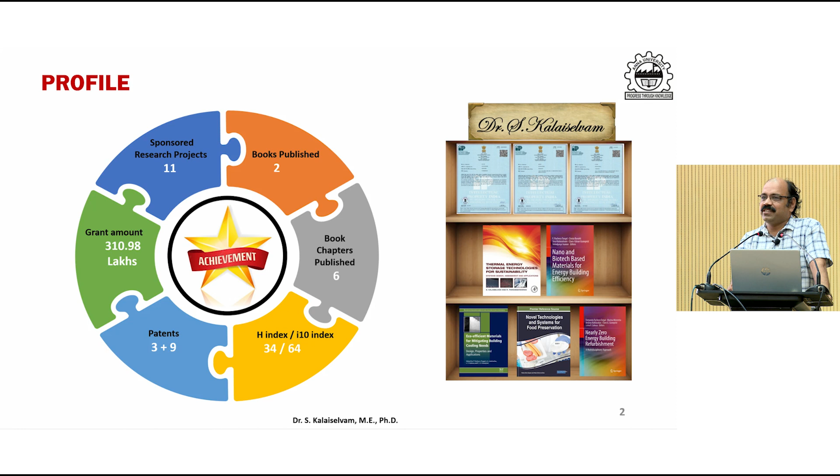These are all our research group. So far I have completed 12 PhD students, and 2 PDF students also, and these are the citations and publications.

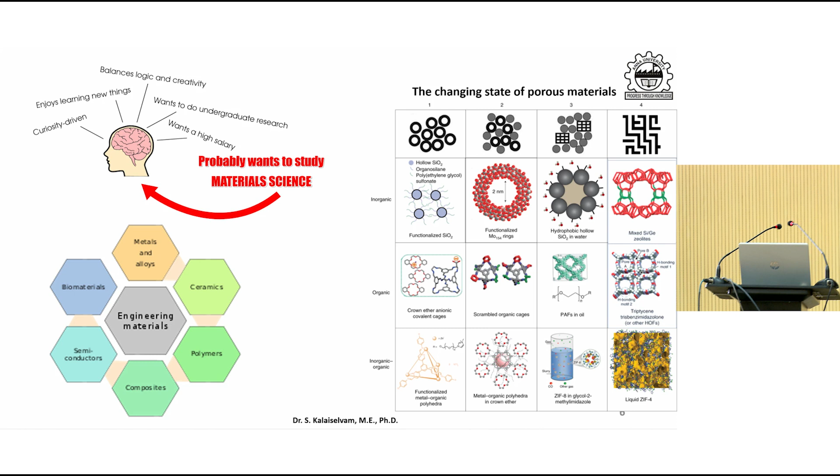material. If you look at that, why we have to choose this material research? So normally, if you look at this material research, what's here? If anybody wants to work with the materials, normally you may find new innovations, new things. If you work with conventional engineering or technology-oriented work, you don't find any innovations. And again, you have an opportunity to learn so many new things working with the materials.

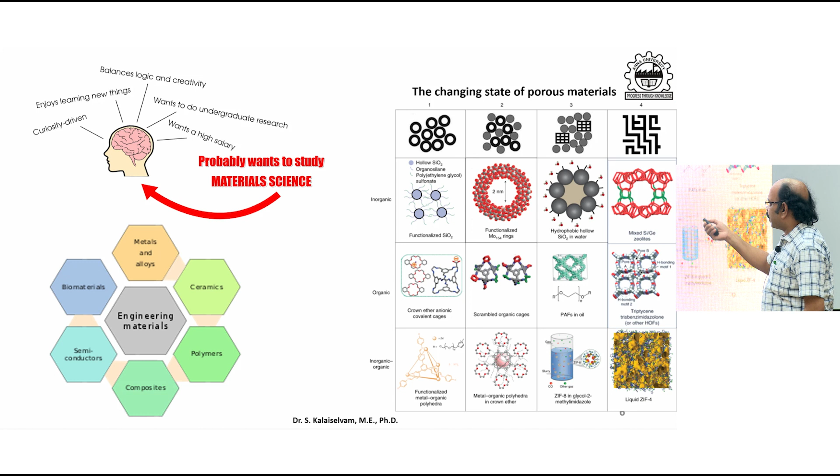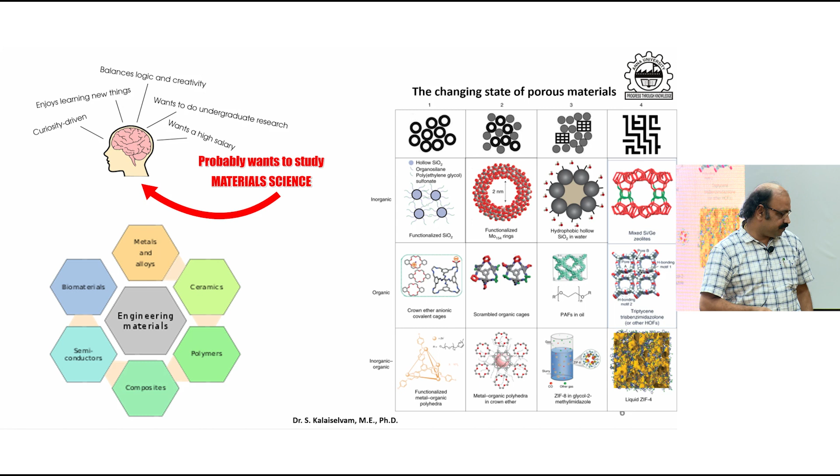Okay? And the salary, right? Normally, the salary is also very high if you work with materials. Okay, these are all the material engineering. You can work with metals, alloys, ceramics, polymers, composites, semiconductors, or biomaterials. And these are some of the porous materials. If you look at the material perspectives, it may be metals, or wood, or plastics, or textiles. Even it can be applicable for the electronics industries. So this material covers all this, right?

And again, because I know that it's a very heterogeneous group, I don't want to go deep into any of the materials. With the mechanical background, if I go deep into the mechanical perspective, sometimes it may get blurred. I will give only the overview of what we did in case of these materials. Okay? So these are all the various materials that you can work on and find new innovations. Okay.

So again, my work is with reference to nanotechnology. As a mechanical engineer, initially, as I told, I tried to work on refrigeration, that is air conditioning. My research was to make people comfortable with reference to ASHRAE standards, to meet all the indoor air quality standards. Initially, I worked for a period of 2 years. After 2 years, it was really very tough for me to publish papers. And that particular work also required funding. Okay?

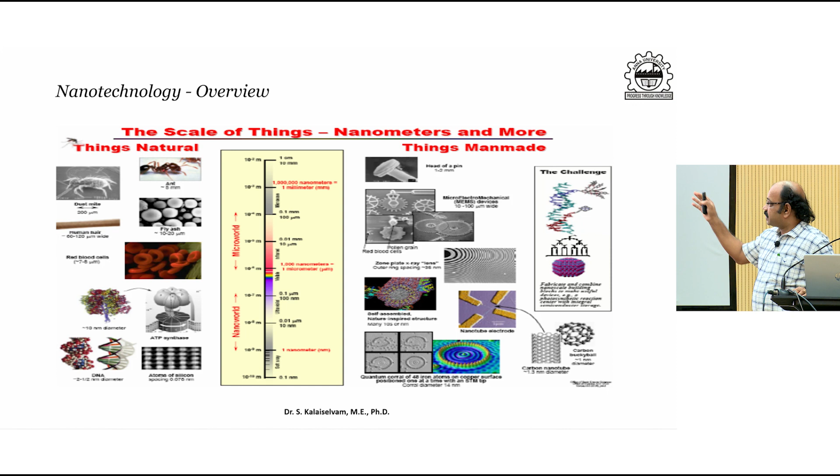So I chose phase change materials, and whatever stuff I showed in the first slide, it's all with phase change materials and nanomaterials. So this is an overview of how nano things work. And again, my work is on nano and energy storage. Because as a mechanical engineer, I can't work immediately with other materials, I work with these materials on energy storage.

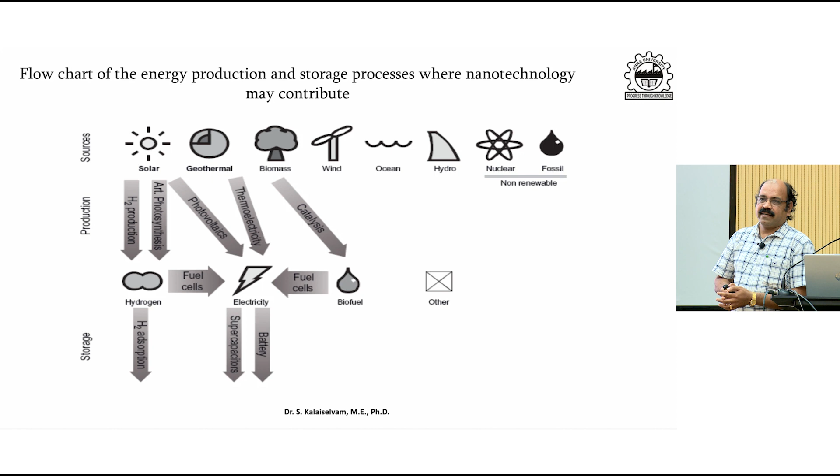So you all know why nano plays a vital role in any industry. If you use nano, you can have an increase in surface area. If there is an increase in surface area, you have higher heat transfer or higher energy storage. Even these days, people are working on hydrogen storage, and for hydrogen storage these nanomaterials are very helpful. And again, because of interface and size effects, nano plays a vital role.

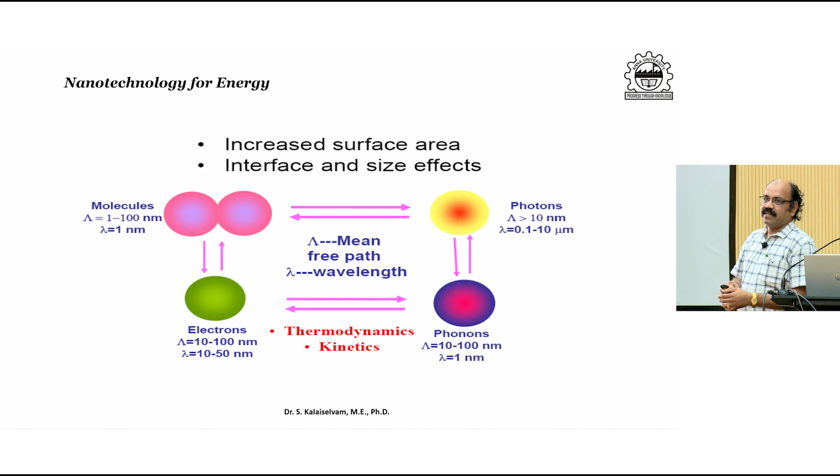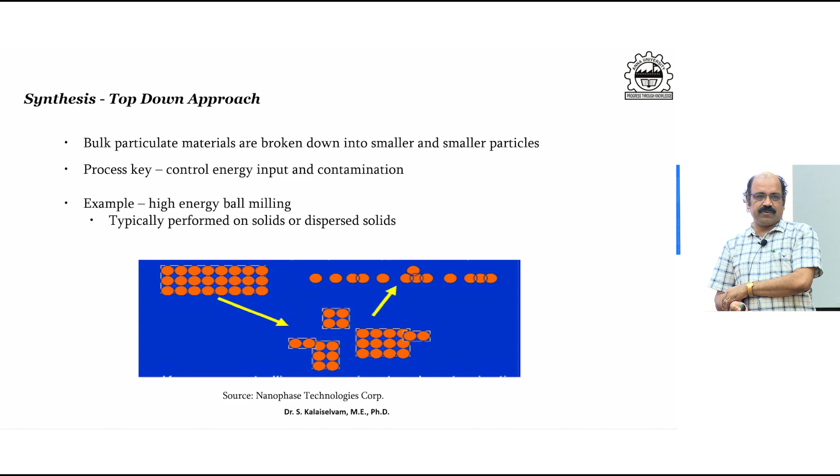As far as nano is concerned, we have nano synthesis by two methods: one is the top-down approach, and the other is the bottom-up approach. In the top-down approach, take paddy or rice; it's in the macro size. If you grind it, what happens? It becomes a powder, in the micro size. Macro becomes micro. If you further grind it with ball milling or other mechanical means, the size again reduces. This is the top-down approach: the larger size is brought down to the lower scale.

The other one is the bottom-up approach. Let us assume you want to make a cylinder, right? If you want to make a cylinder, what can you do? You can place 1 rupee coins, right?

If you place 100 one-rupee coins or 50 one-rupee coins in an inline direction, what happens? It becomes a cylinder. Similarly, in case of this bottom-up approach, we used to build the size whatever you want at the atom level. The atoms can be placed in such a manner that it can be formulated into whatever size or shape you want. And again, this particular one has a higher purity level.

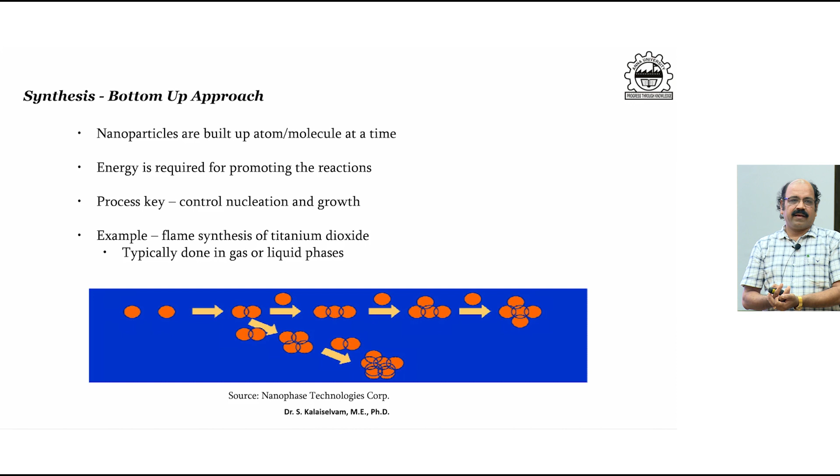Normally, initially, people who wanted to work with nanomaterials used to work with a top-down approach. It's one of the easiest methods. But even though it's the easiest method, there are a lot of impurities. I told you that we use grinding, milling and other operations, so the impurities in this approach will be very high. In case of the bottom-up approach, you work at the atom level, and it's a high purity level.

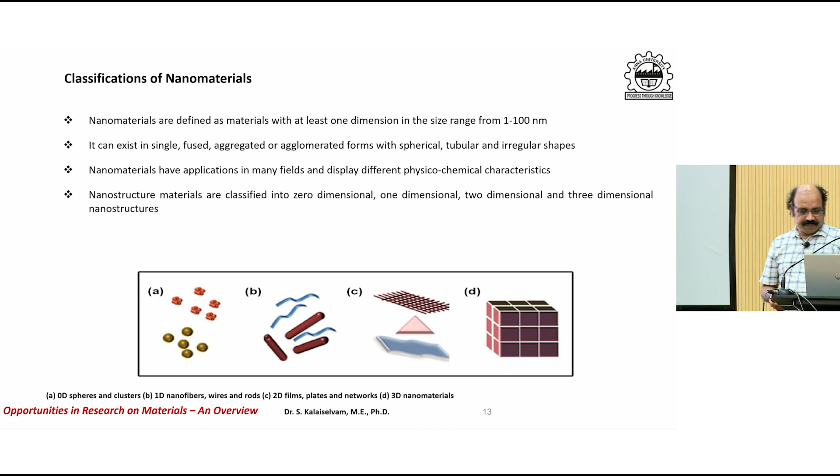So these are some of the nanomaterials: one-dimensional, two-dimensional nanofibers, wires, rods, films, or even 3D nanomaterials. Here again, some of the nanomaterials. This is by top-down approach; the center one is a nanomaterial. We can take this bulk material, make it powder, and it can be converted into a nanoparticle, or otherwise atoms can be formed into a cluster, and that cluster can be made into nanoparticles.

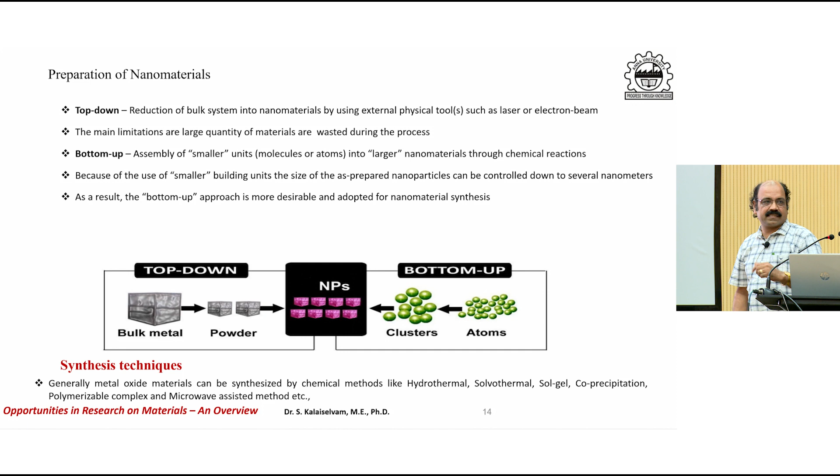Whenever I go for this nano type of discussion, you would ask why this is more important, right? Look at the properties of carbon nanotubes. If I ask a mechanical engineer which is the best conducting material, copper. We all know copper is the best conducting material. But carbon nanotubes are better than copper. What's the property of bulk carbon? It's an insulator. If you bring it down to the nanoscale, that insulating material becomes a good conductor, much higher than copper.

And if I ask about transistor material, we say the better transistor material is silicon, right? Carbon nanotubes will be better than this transistor material. Then heat conducting property: because of its higher heat conducting property and strength, we used to say diamond is the best, but this has twice the conducting property, field emission is more efficient than molybdenum, and the thermal stability of this material is important.

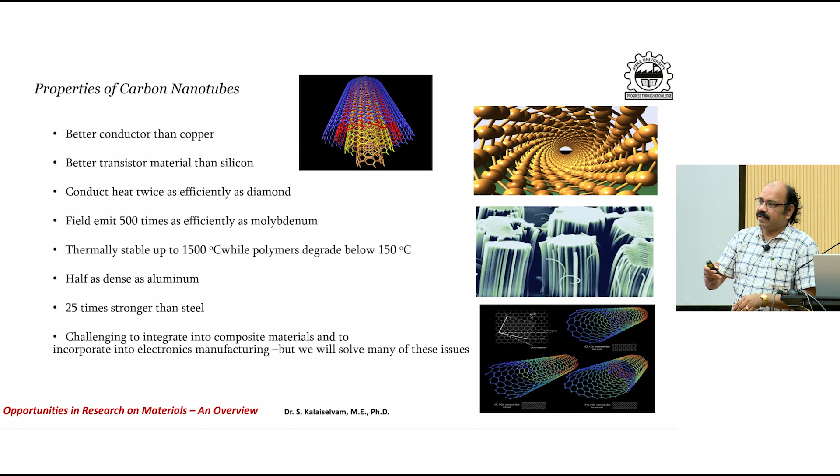Here again, these are nanofibers. Sometimes the synthesis of carbon nanotubes may be very complicated, but initially, instead of synthesizing carbon nanotubes, you can easily produce these nanofibers even at lab scale without any specialized equipment. These fibers have a diameter less than 100 nanometers, and they can be easily produced by polymerization and electrospinning. I am going to tell you how they are synthesized.

Their properties: high surface area like carbon nanotubes, high porosity, and the diameter ranges from 50 to 100 nanometers. It's ultra thin, very soft, and can be easily mixed with solvents. It has a soft touch, and this particular one was produced in our laboratory.

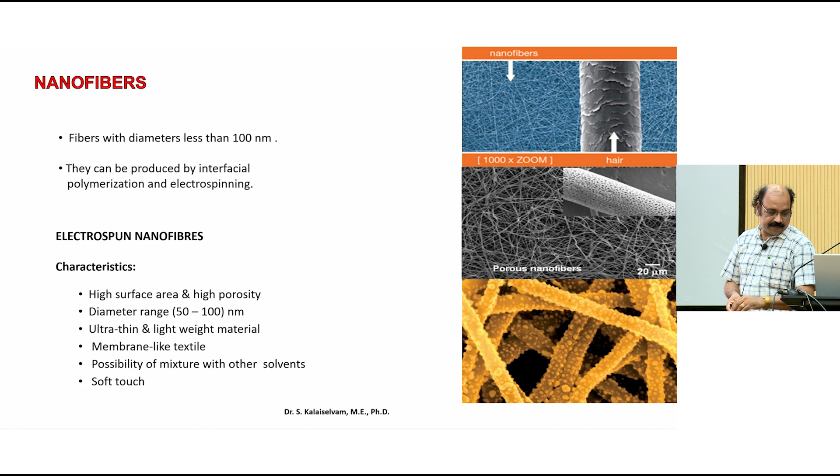This polymer nanofiber application is used in tissue engineering, wound dressing, medical applications, sensor devices, electrical and optical applications, and materials. This nanofiber finds wide applications. Whether you are an electrical engineer, electronics, civil or mechanical engineer, or any other field, you can use this material.

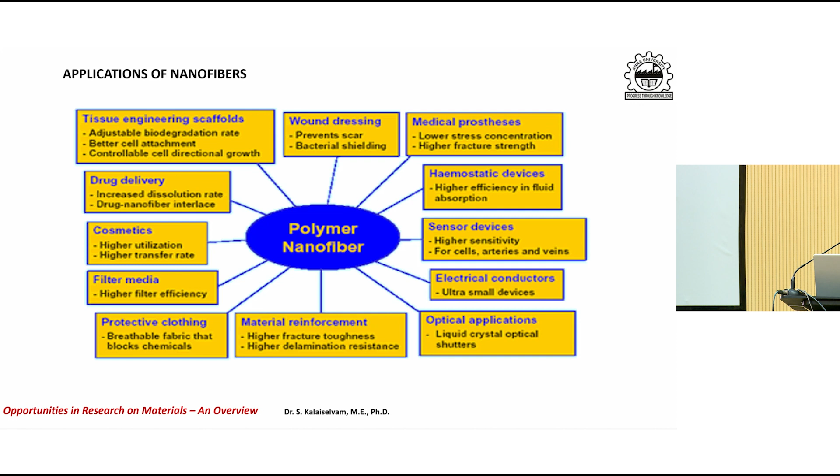That is why I'm giving an overview. If you take electronics applications, you may look for an alternative for silicon, and we have an alternative with superior properties. In case of mechanical engineering, sometimes we look for higher thermal conductivity or higher heat transfer coefficient, and using this nanomaterial or nanofluids, you can find high efficiency.

In olden days, in automobiles, if it's stuck in between, what they used to do is open the bonnet and fill water in the radiator. Do you ever notice that? But these days, does anybody fill water into that radiator? You don't find that. If you look at the previous, olden days car radiator, the size is very large. If it's larger size, obviously the cost will be higher, and the material required is also much higher.

So these days people use nanofluids as the fluid inside the heat exchanger or radiator. If you notice, if there is any leak in that radiator fluid, its color is blue or pink, sometimes greenish. It's nothing but a nanofluid. Because if you use that nanofluid, the heat transfer coefficient will be high, so you can reduce the size of the heat exchanger. If they reduce the size of the heat exchanger, obviously the cost reduces. Similarly, in all heat transfer applications, all mechanical operations, we are trying to use these nanomaterials.

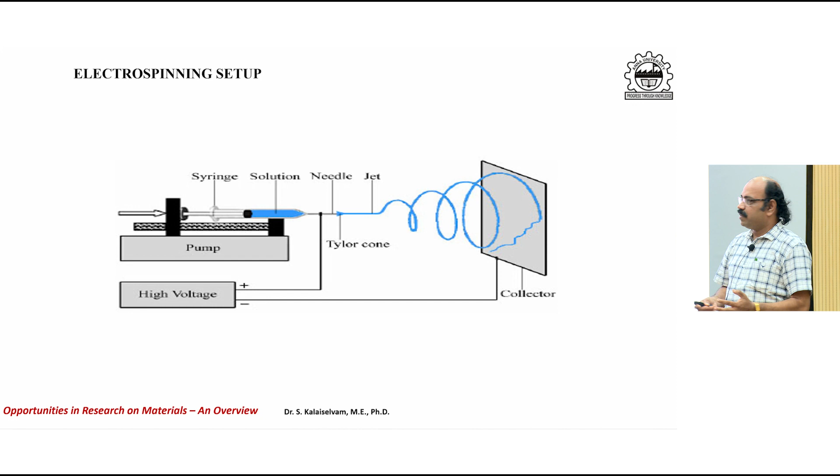If you look at that, this is only a syringe with a mechanical arrangement, and this is again a collector. The needle size determines the size of the fiber that comes out. Normally, even if you apply any force, it will not come out, because of electrostatic force it has to come out. It's a very simple method of producing these nanofibers.

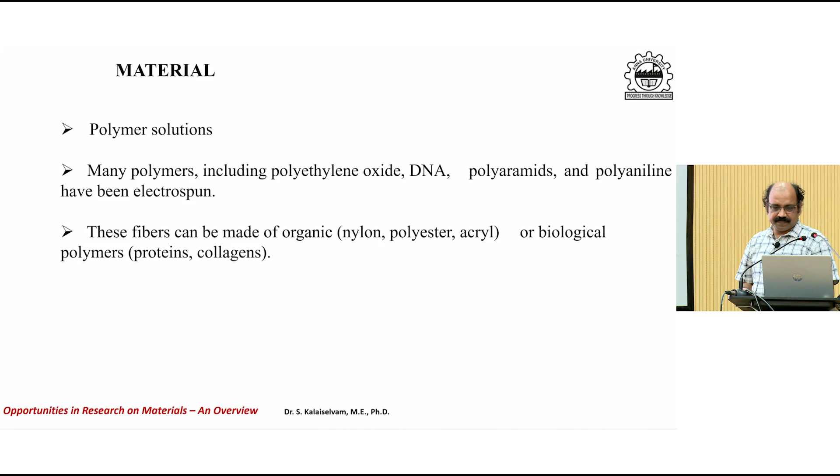So these are all the properties. The nanofiber production again depends upon parameters like viscosity, conductivity, and solution temperature. These are all the parameters that affect the synthesis of these nanofibers.

These are some of the nanofibers produced in our laboratory. Some of them we used for medical applications, and some nanofibers we used for supercapacitor applications, and for storage, battery storage. These are all the materials we produced. This is the gadolinium oxide nanofiber, again synthesized in our laboratory for medical applications.

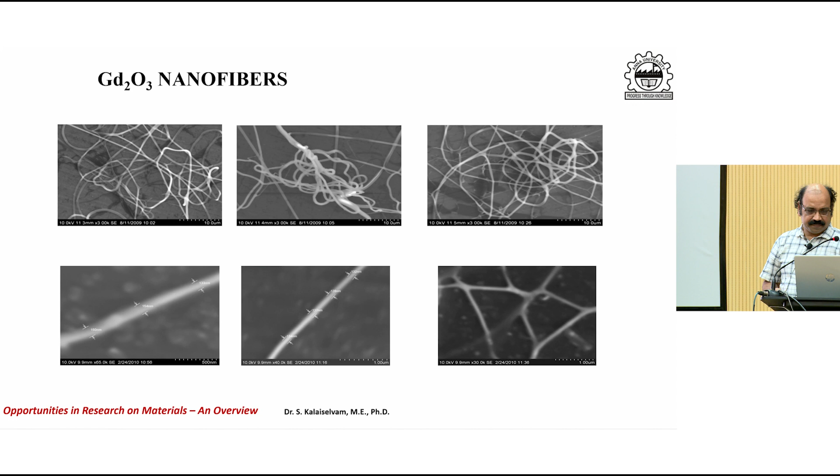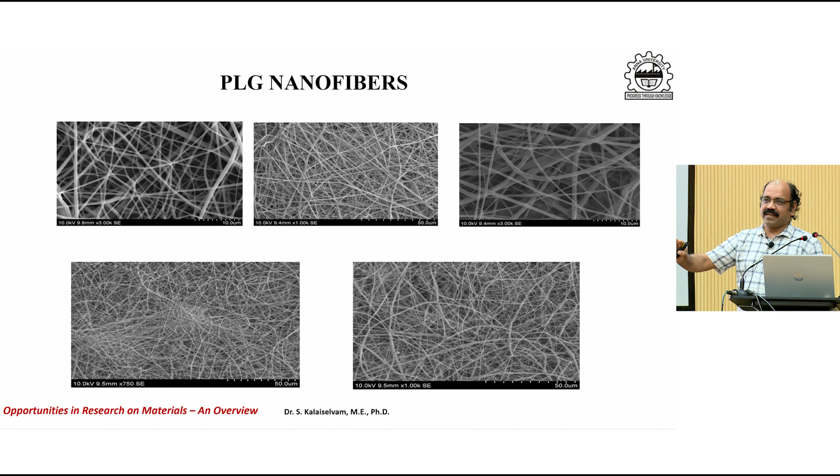This is a PLG nanofiber, which can be used for medical applications. I'm a mechanical engineer, but if you know how to make this material, it can be suitably used for any application. This is again a nanofiber, published in Applied Surface Science. Most of these I don't have time to quote.

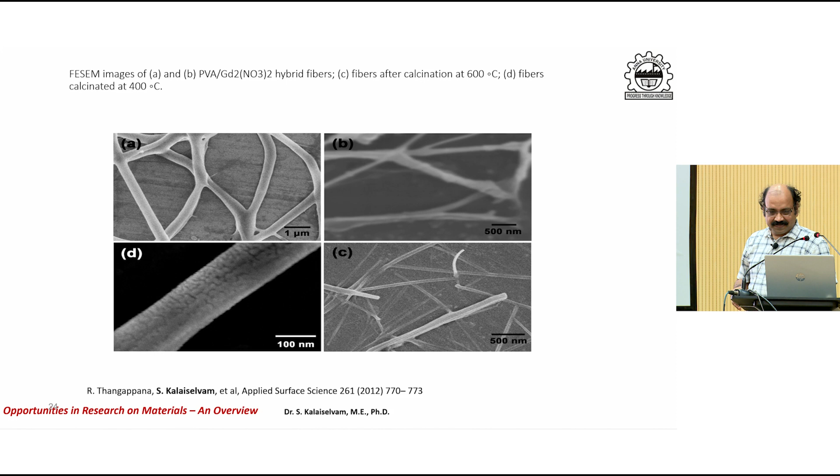This is one method for fiber surface coating. Normally, in surgical applications, you may find that instruments have to be coated with copper material, because copper has higher antibacterial properties. That is why sometimes they say you take copper with food, because of its antibacterial properties. So instead of having surgical instruments made of stainless steel, we can coat copper on the surface. For that we use particular techniques for this coating, and we coated with different layers and studied the antimicrobial properties, published in literature, and this is very effective.

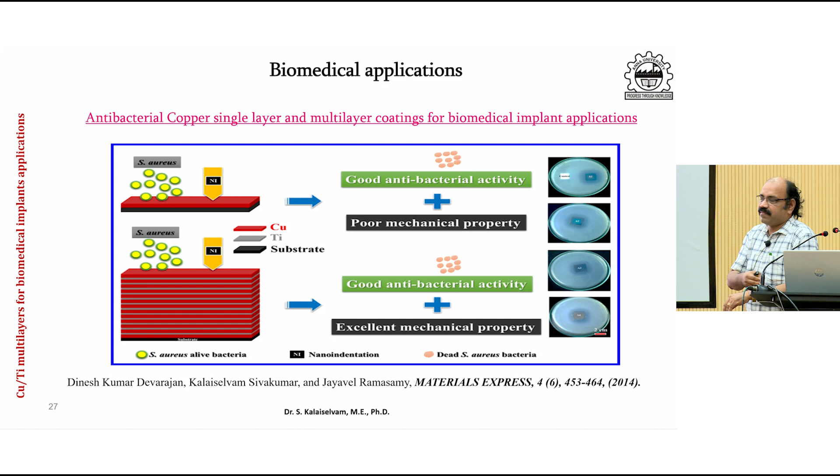The material we chose has to be coated with copper and titanium. These are the properties, similar to what I mentioned about PCM used in car radiators with nanofluids. Similarly, we choose phase change materials for green building applications.

In green building applications, the building needs to be energy sustainable and reduce the use of unsustainable materials. For that, we make phase change materials that reduce energy consumption.

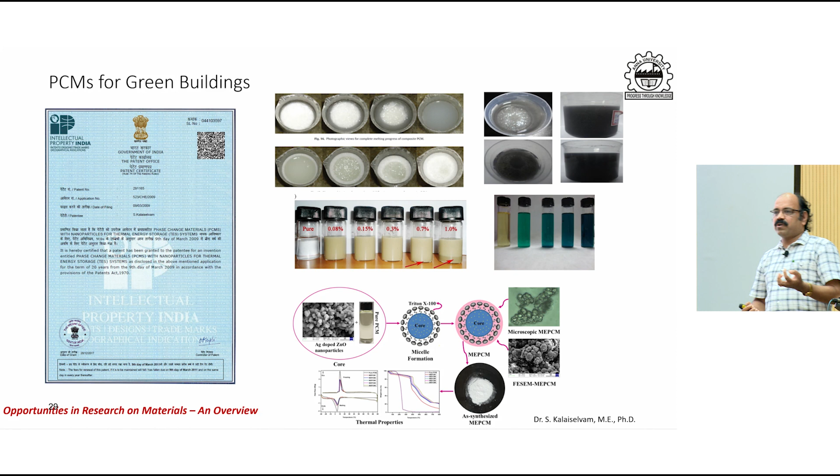So what happens here is part load and peak load operations. Normally, not in India but abroad, if you use electric power during peak hours, the consumption charge is higher. After 12 o'clock, if you use power, the charge is much less. So we use part load operations and store that energy in thermal form.

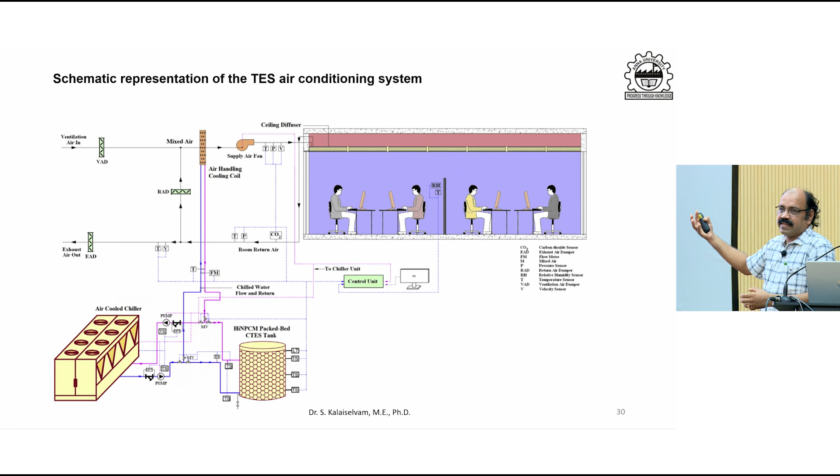This is a comfort cooling application. Instead of this chiller unit feeding energy directly into the air conditioning room where people work, we use a buffer unit. In the buffer unit, we store the cooling energy, and it is used whenever there is a requirement in air conditioning applications.

Normally in rural areas, they go for drying applications like food processing and drying. In these areas there isn't continuous power, there may be power fluctuations, and if the process purely depends on power, the processing cost increases.

So what they do is go for drying. Suppose there's a fish product that has to be dried. They can use natural sunlight, but if you use natural sunlight, that product won't be in a suitable form to import or export — the food quality gets affected and the texture isn't uniform. So we go for mechanical drying, but mechanical drying requires electrical power. Our intention is, instead of relying on electrical power, to store the heat energy.

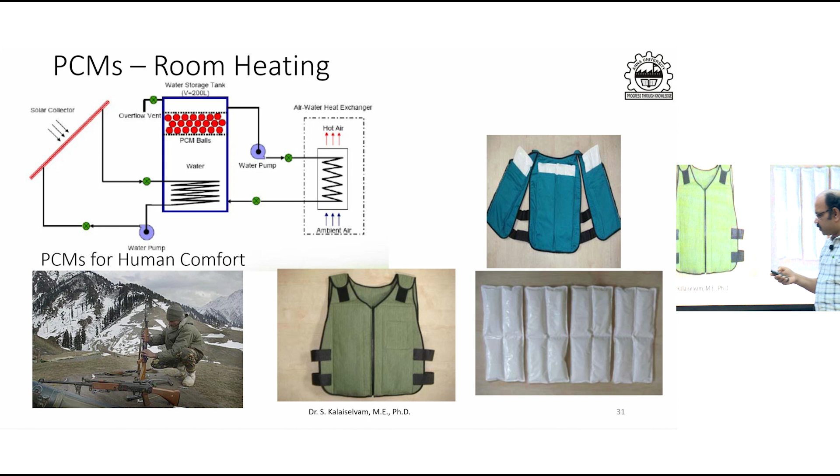This is a solar collector. That heat energy is stored in PCM balls, and those PCM balls cater to the heating application needs. Even during night time, it can be continuously used without any electric power.

And I mentioned this is a thermal jacket that can be used for adverse climates.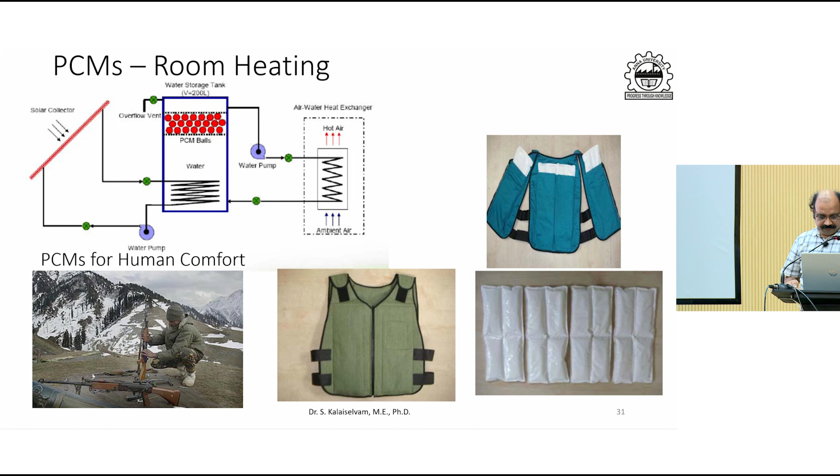And this is the phase change material. Normally, when it's in liquid form, the thermal conductivity will be very low. If you want to increase the thermal conductivity, we add this type of nanomaterial into it.

Does anybody know the conductivity of copper? What's the conductivity of liquid materials? Any mechanical engineers? It may be on the order of 0.5 units for liquid, while the conductivity of copper is on the order of 400 units.

So what are we supposed to do? Normally, if you keep water in a refrigerator, how long will it take to make ice? Let us assume I give you a cup of water and want to make it into ice — how long will it take?

Hardly 3 or 4 hours, right? If you keep a cup of water in a freezer unit, normally it will take a minimum of 3 to 4 hours. If you give the same water to me, I will make the water freeze within 30 or 40 minutes.

Why does this happen? If you go with conventional water, the conductivity of the water is in the order of 0.5 units. What I used to do is add copper or other materials into that. Suppose you are adding copper to water, what happens? If you put a copper rod into the water, it will disperse and sink. But the intention is to make it float. If you make it float, obviously it will have the same properties.

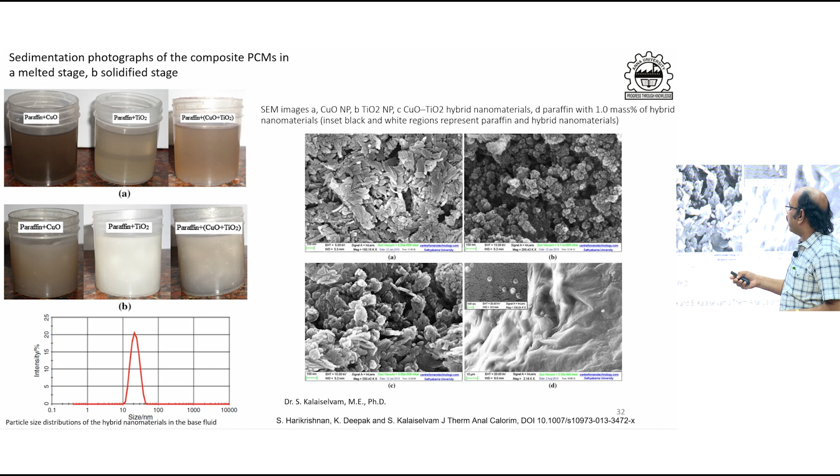To make it float, we have to make that copper in a nano form. If it's in nano form, it will have higher surface energy, and again it will be uniformly dispersed. If you look at that, the first one is paraffin material with copper oxide, then paraffin with TiO2, and paraffin with the combination of copper oxide and TiO2. So here the changes with paraffin and copper oxide, paraffin with TiO2, how it has to be.

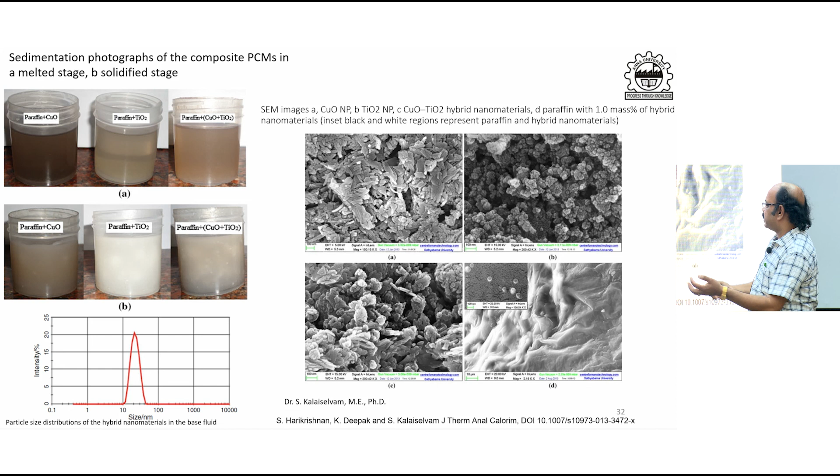So again, this is about how long you can add this nanomaterial. Take water - I told you I can add copper into that - so how long can I add it? If you keep on adding, at one particular point it will get agglomerated, because of higher surface energy it will get agglomerated.

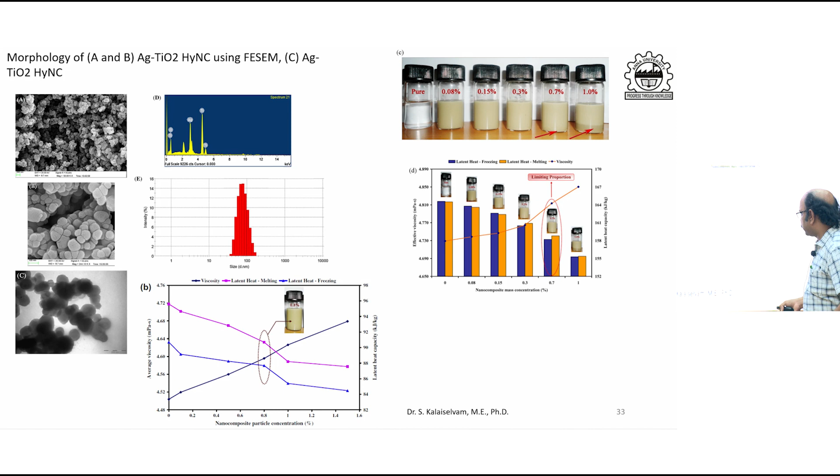Once it gets agglomerated, what happens? The size becomes nano, then micro, and if it becomes micro, it will settle down. This shows the normal curve - how long you can add it. If you look at that, the 0.8 particle concentration weight fraction is the maximum limit. Beyond that, it becomes an adverse effect.

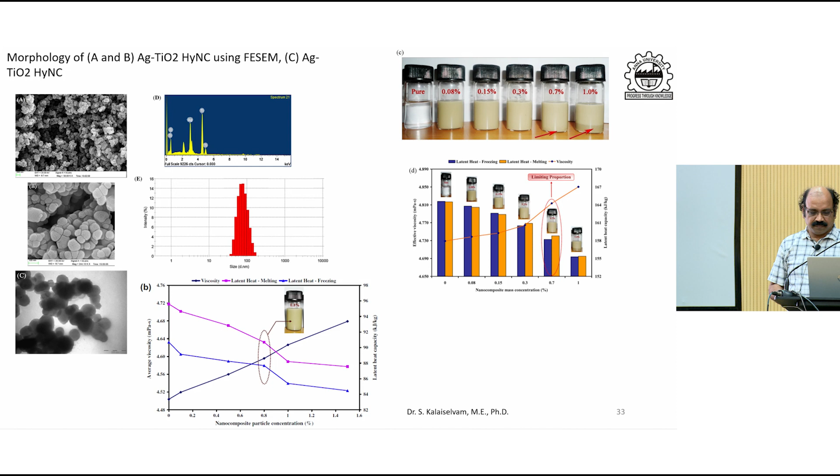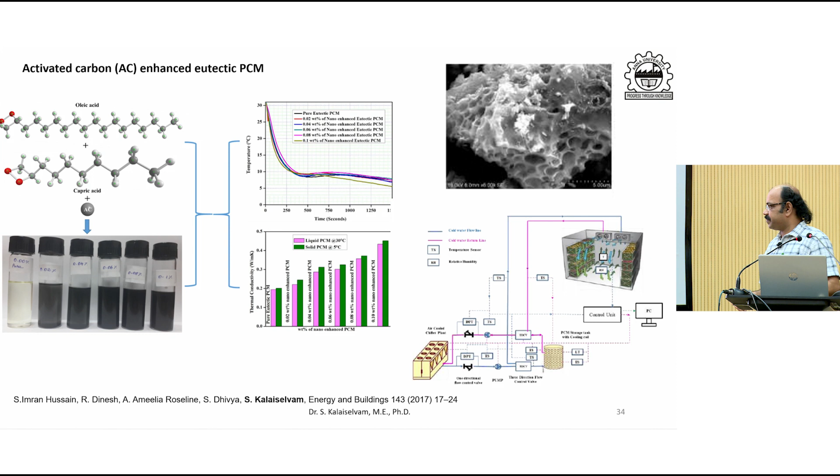This is a material we invented for comfort cooling applications. Normally, in the case of a helmet, if you place ice in between, the PCM is in liquid and solid form, and only then does the energy exchange take place. If you provide liquid material above your head and there is any impact, what happens? Let's assume I'm putting a liquid above my head - if there's an impact, it will spill over my body and create a lot of other problems.

So instead of storing it as liquid, I can store it in powder form. That powder material itself is capable of storing the latent heat. You all know latent heat, right? Normally in the case of ice, if you cool the water at 0 degrees, what happens?

It will retain the 0 degree, right? The water becomes ice. When it becomes complete ice, then only it reduces the subcooling temperature. Maybe it will go up to -5 or -10. Beyond that, it can't go, right? That's latent heat. So whatever the helmet cooling applications, whatever the PCM applications, we used to store as a latent

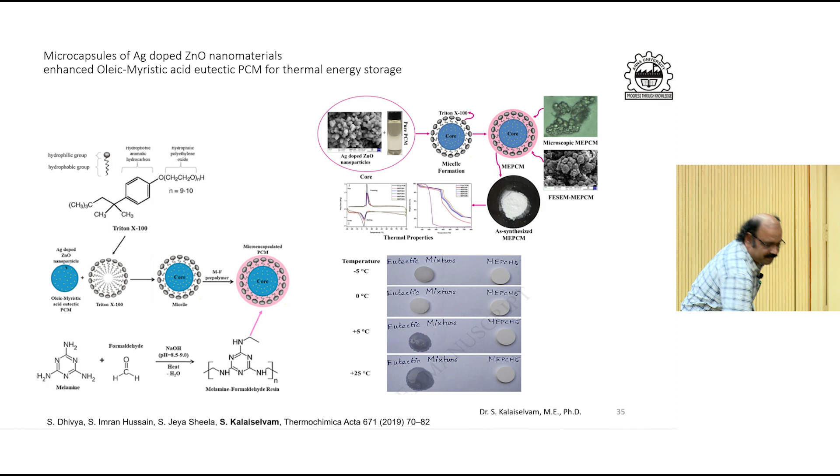Yes, thank you. So normally here, this is water, right? It's a latent heat material. I am encapsulating it with the plastic. We used to call that a cylindrical encapsulation. So here, the liquid is stored in this container. If there is any accident, what happens? It will spill over. So instead of that, this water itself, I will make into a powder form.

Okay? This water, even at 24 or 25 degrees centigrade, is in powder form. Normally this water becomes a solid at 0 degrees centigrade, right? So normally this water is encapsulated; this polymer material is a macro encapsulation. Instead of going for a macro encapsulation, we go for a micro and nano encapsulation. This water molecule will be encapsulated with some polymeric material. So you can take this powder and put it in a packet. It can go anywhere. The same technology is here.

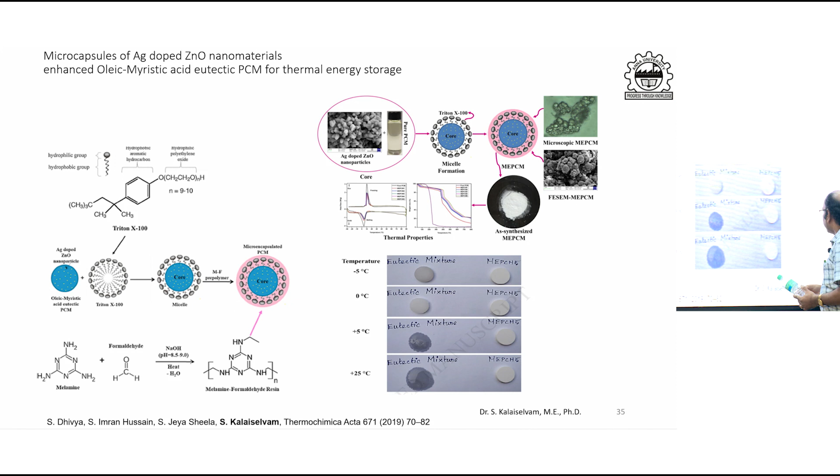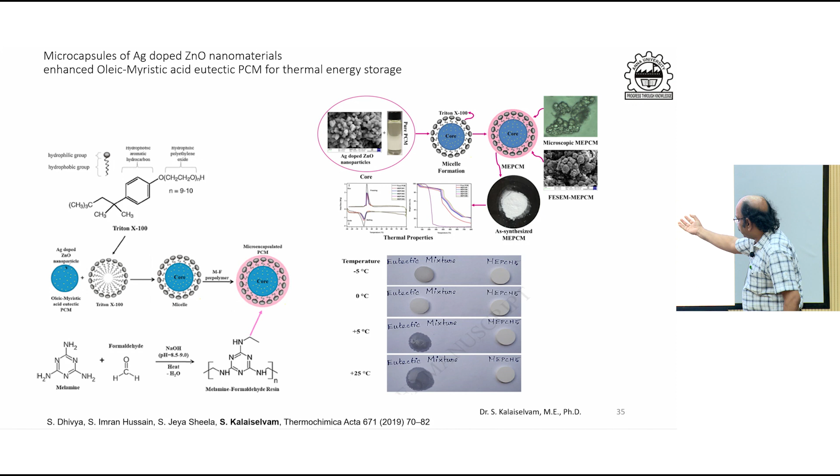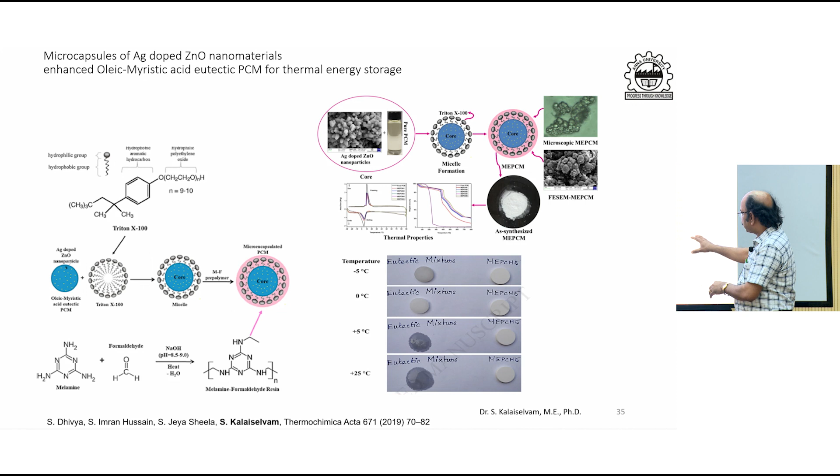So here, at -5 degrees centigrade, it's solid. And this micro encapsulated PCM is again in solid form. At 0 degrees centigrade, solid. If you look at the conventional phase change material, this becomes a liquid, right? In this photograph, the solid becomes a liquid. But our micro encapsulation is still in the solid form. Even at 25 degrees centigrade, the normal water or normal PCM becomes liquid, but ours is in the solid form. This technology we used for helmet cooling application.

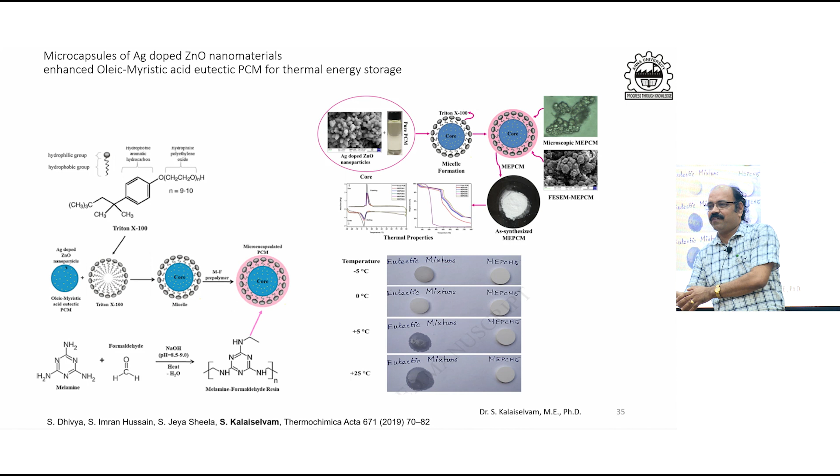The materials almost remain the same, but the application changes. We use this for helmet cooling. We use it for thermal jackets. We use the same for heating and cooling applications, right? By making these different applications, I can have different patents. So that is why it is possible for us to go for more patents, right? It's a very simple technique, because if you know how to make this material, it can be projected in any way, right?

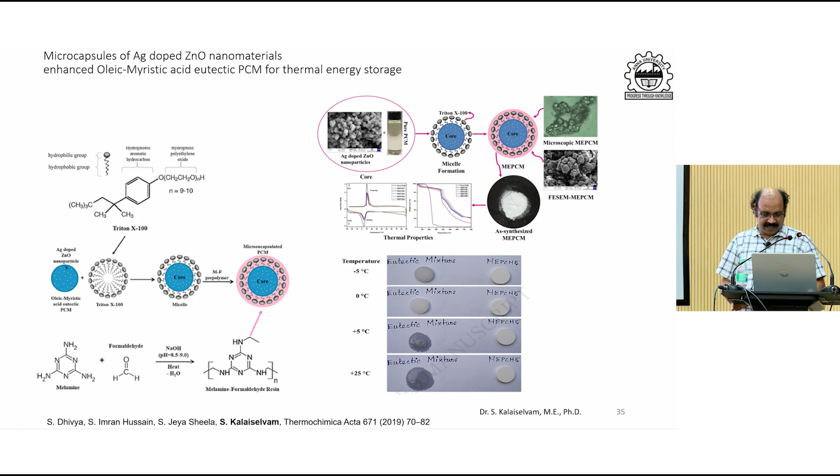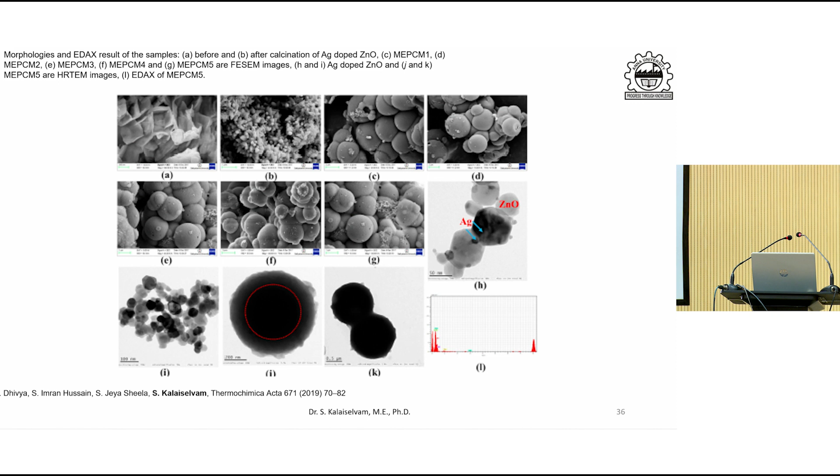So if you look at that, this is a bottle with spherical encapsulation. This is an encapsulation, and inside that we have the liquids. It's in the micro size, right? Even if you crush it, nothing will happen. The same thing, we use it for building cooling applications also.

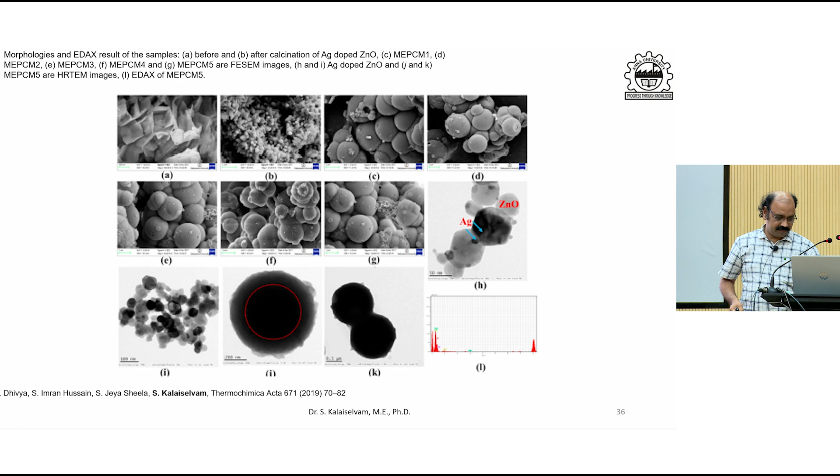And again, as I told, as mechanical engineers we also work with the civil people. If you look at the conventional building, what happens? Maybe after 3 or 4 o'clock, the heat infiltrates into the building, right? If you ask any HVAC engineer, our botheration is only at 3 or 4 o'clock. We have higher heat infiltration because of solar radiation, right?

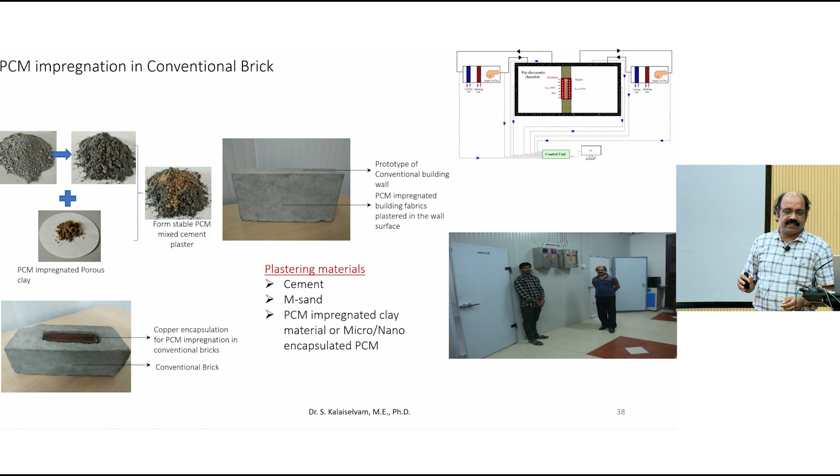So there's a problem. That is why, as I told, there's micro encapsulation. It is mixed with cement and sand, we mix the powder material into that, and we plaster over the surface. Because of that, it will have the same impact. Again, we patented this; we are in the process of obtaining a patent grant for this.

So these are some of the research projects we completed for the Department of Science and Technology, under the Young Scientist Scheme. We received funding of around 14.4 lakhs in the year 2010. It's for nanoparticles dispersed in phase change materials.

These are the phase change materials we synthesized, and these are the nanomaterials we dispersed into them. We filed a patent and also received a patent for this particular work. So we have a quantum of PCMs with nanomaterials. If anybody wants to use that, it is a patented technology. And this is the experimental setup we created.

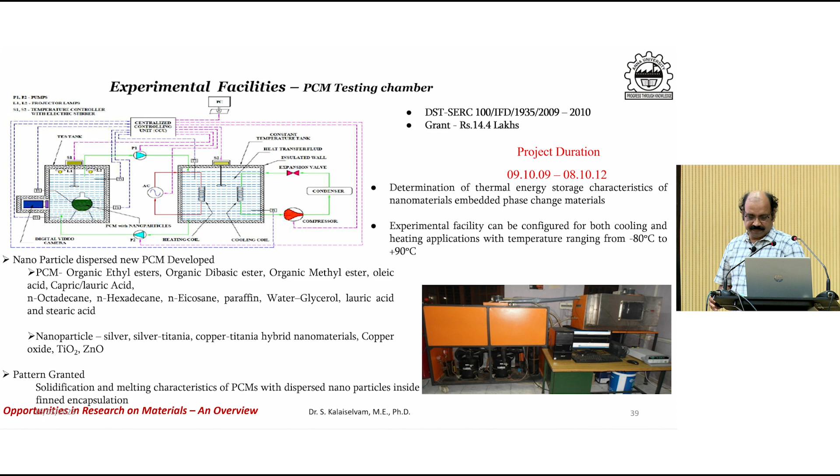As I told, this is for drying applications. It's a UGC funded project. Here, this is a solar collector, and this is a drying unit. Normally in conventional drying, people take the heat directly to the drying unit and the product gets dried. During night time we don't have sunlight or solar radiation, so it will not work. And for any drying product, the performance will be enhanced only if you dry it in a very controlled environment, at a very controlled temperature.

Take fish drying, or banana, or tomato. You can also make tomato in a dried form. You can also make dry grapes. You all know that, right? Dry grapes are again a dried form. For that you have to maintain a proper temperature and humidity.

So we have a solar collector. The heat will not go directly into the drying unit. Instead, we have this storage tank, an auxiliary storage tank with the PCM tank. The PCM tank will store the heat energy, and this can be supplied to the dryer.

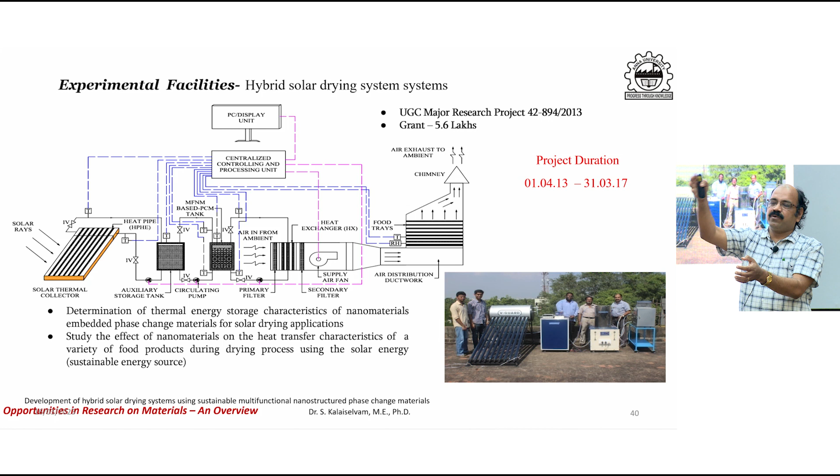So instead of going directly, it is stored, like battery storage. A battery can be used for storing electrical energy, and when there is no power, this current can be used. Similarly, this heat energy is stored in a unit, and it can be used whenever there is a requirement.

And this is another project, again a DST project. The grant is around 49 lakhs. This is for designing a thermal property analyzer. As I told, mostly we work on thermal conductivity.

So we invented a machine to measure thermal conductivity without any destruction of the sample. The accuracy of that instrument is around 99.99%. Using this setup, you can find the thermal conductivity of any solid sample. It's again a patented technology, and it is available in our laboratory.

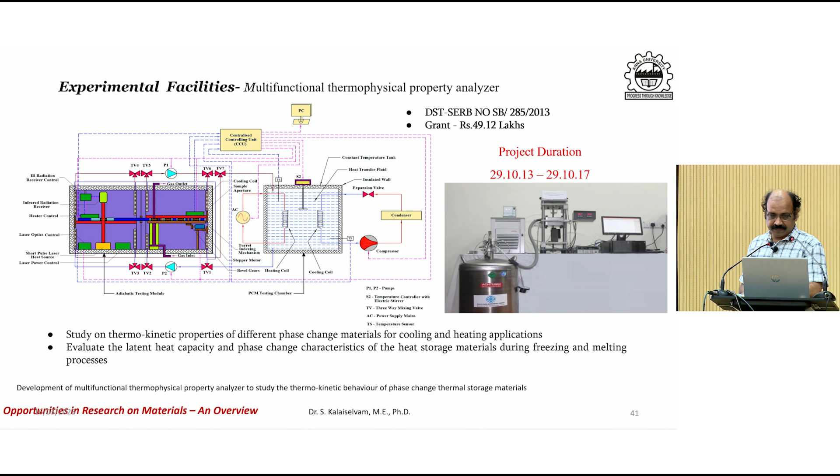And again, I told that this is PCM bricks, right? The bricks that can store the heat and cooling energy. It can be tested in this particular chamber. And in addition to that, we have also the blinds with the phase change materials.

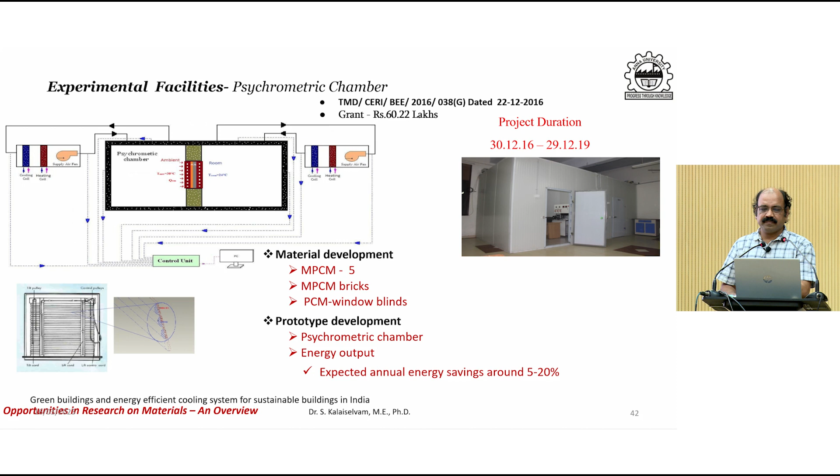So this recent work, this is again a DST funded project, costing around 37.7 lakhs. This is for the desiccant wheel, right? Normally for desiccant cooling applications, this again is a building cooling application. As I told, buildings consume higher power, and that is with reference to the air conditioning unit. So in case of an air conditioning unit, the latent heat plays a crucial role.

So normally in places like Chennai, if you go without air conditioning, how do you feel? You are highly suffocated, right? That is because of the moisture that prevails. Normally in case of an air conditioner, if you look at the backside, water will be dripping, right? That is nothing but the latent heat. In air conditioning, we have to concentrate on both latent as well as sensible heat. Normally the sensible heat can be easily reduced, but in case of latent heat, we require higher energy.

So this particular wheel is called an enthalpy wheel. It will absorb the moisture, right? That's the way it can reduce the latent heat. So here again, the same nanomaterials. The material will be the same; the application is slightly modified in a different form. So here we recently filed a patent for this particular work.

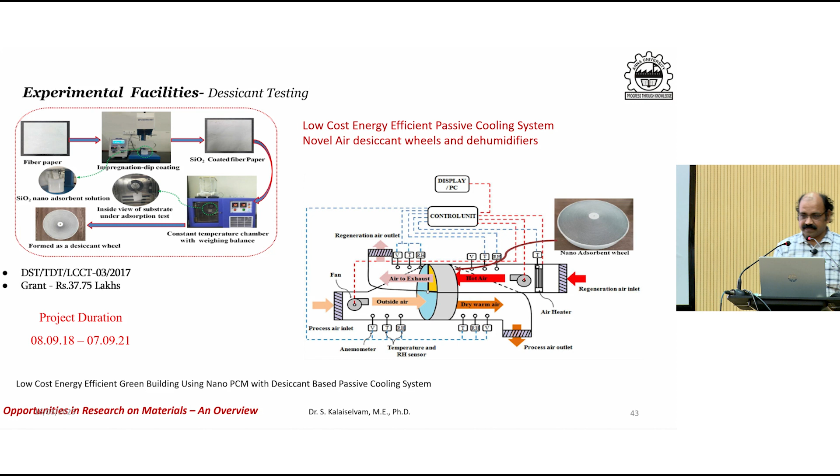And this is for electronic cooling applications. So here again, this is a funded project. This is DST. The grant is around 33 lakhs. The material will be the same, only the application is diverted. So here, if you look at that, that is nothing but a processor of a gaming computer. If you look at the size, it's the size of a gaming computer processor.

Above that, we have a heat sink, right? The processor is one of the main components that will generate heat, right? If it is not maintained at a proper temperature, what happens? The processor performance will be greatly affected. The processor will work effectively at a temperature of 70 degrees centigrade. We have to maintain the processor below 70 degrees centigrade. So for that, we have a heat sink.

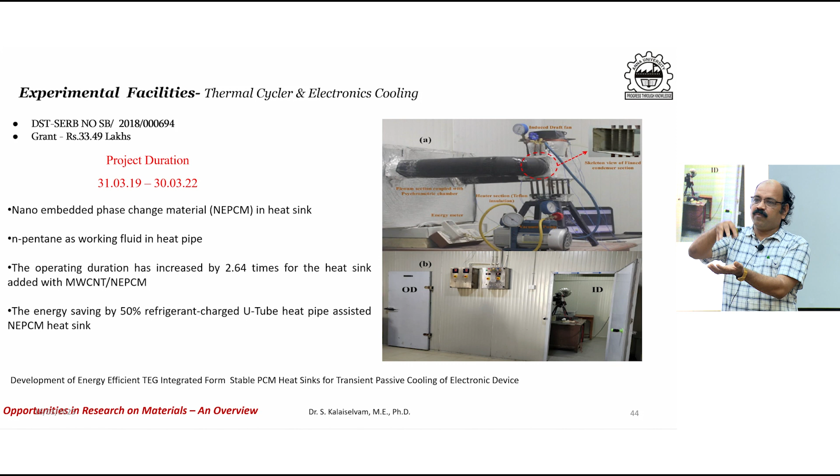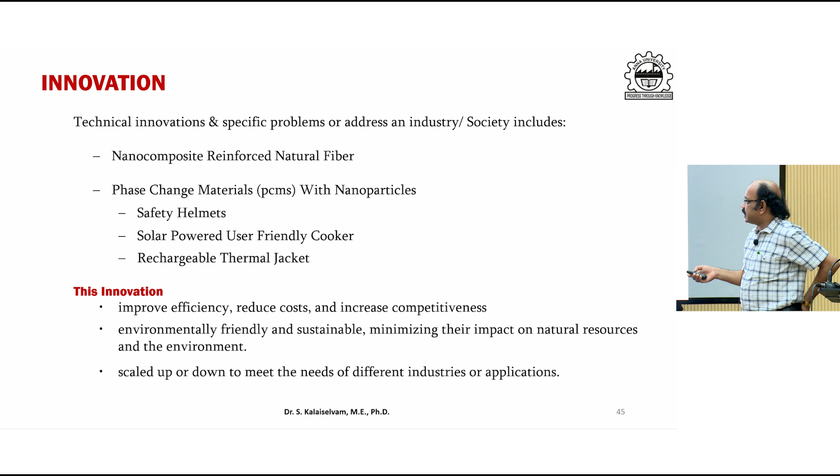And these are some of the innovations we did using these phase change materials. So as I told, the composite materials, right? This is even a natural fiber composite material. If you go with the conventional natural fiber composite, you don't have strength. So to enhance the strength of this material, we added the nanomaterial into that, and we tested all these properties.

By adding this nanomaterial, suppose for any material, if you want to increase the tensile strength, you have to add the material accordingly. In some applications, you are supposed to have a higher compressive strength. Sometimes you may require a higher ductility. So depending upon the property that you are looking for, you have to add this material, and that will enhance the property, right? Yes.

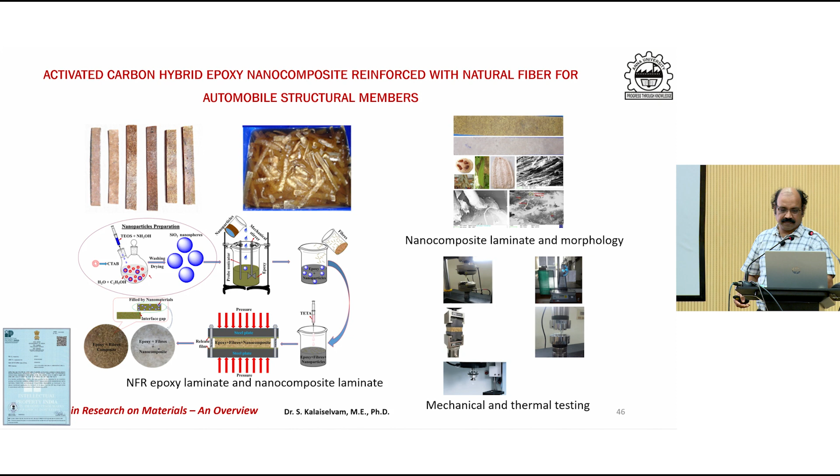So these are all the natural fibers, right? We use hemp, luffa, jute, and all this. Even the banana, coir, pineapple; these are all the fibers we used for making these natural composites, and these are all the nanomaterials: natural fibers, titanium dioxide, carbon. These are the various nanomaterials we mixed into these fiber materials.

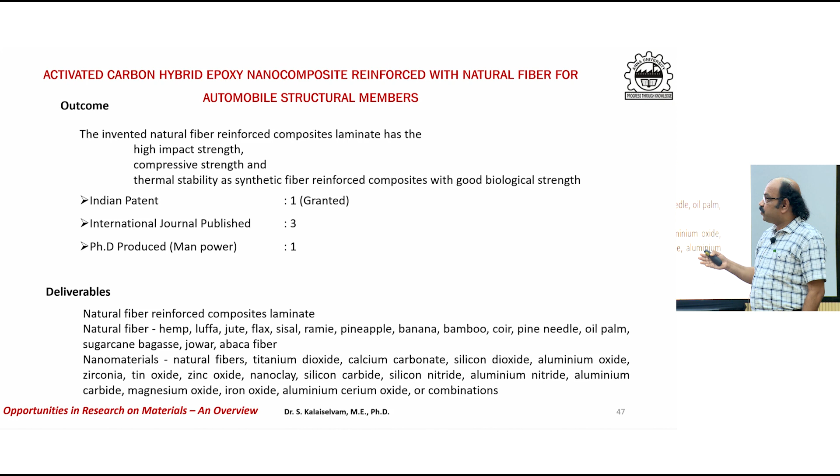Because of that, we have a higher impact strength, we can also have a higher compressive strength, and we too have higher thermal stability. Because of that, it was possible for us to have one Indian patent, and using this work, we also published 3 international journals.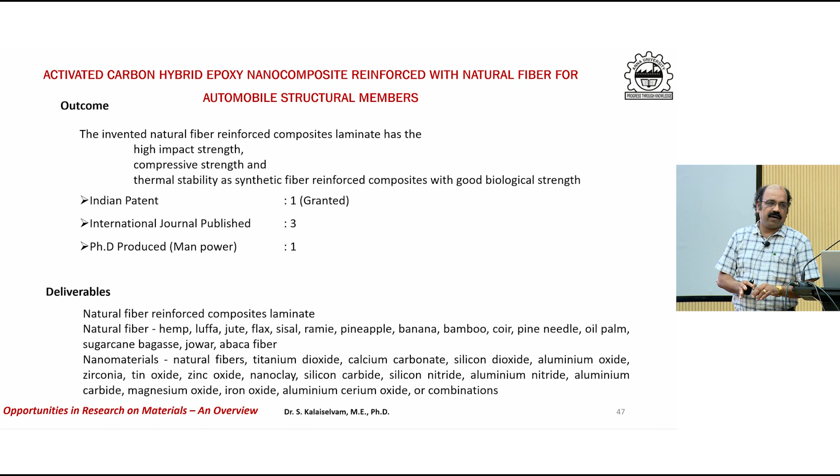Here it's a very heterogeneous group, that is why I'm giving only an overview, otherwise I can go deep into that. I can say what the mechanism involved is, how it has to be improved, and, if it's a compressive strength improvement, what properties you have to make and what materials you can use. That we can discuss, because if I go deep into that, it may be more from the mechanical perspective. That is why I'm not going deep, I'm giving only the overview, right?

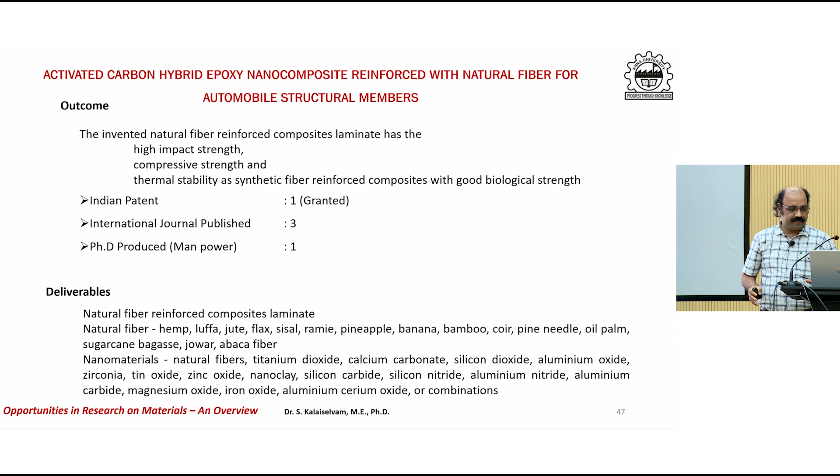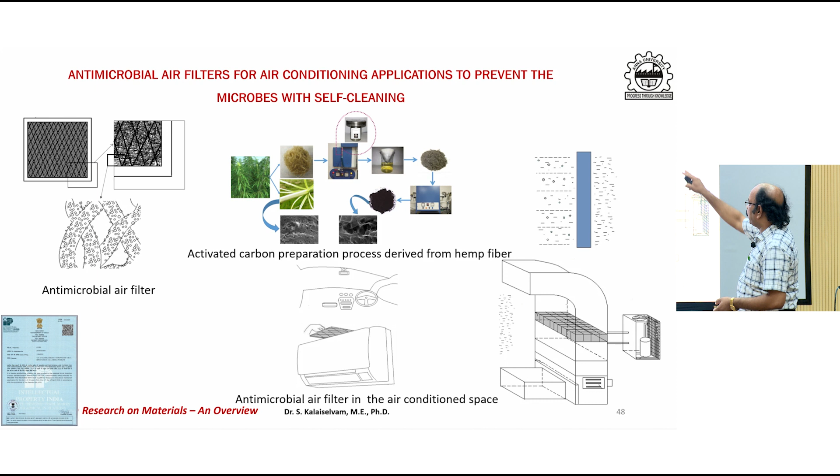So this is again the antimicrobial filter I told you about. That's a filter we invented, and it can be used for air conditioning applications, chimneys, or clean room applications. This is a conventional media filter coated with activated carbon. And this activated carbon we synthesize using natural materials. We proved that it has the capability of killing microbes, so the patent was granted for this work.

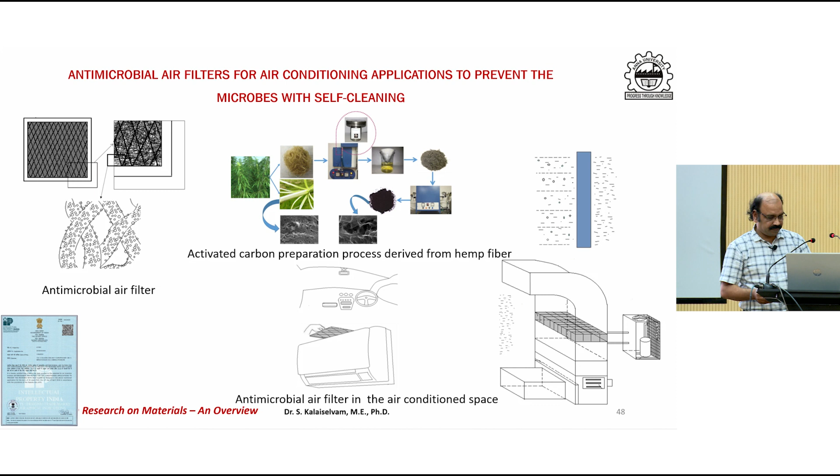If you look at the air filtering capacity, it reduces the growth of microbes by 90 to 97%. Normally, in an air conditioned room, sometimes you may have a foul smell, right? Then the AC mechanics will come and clean the filter, and the smell will be reduced. The foul smell is because dust accumulates in the filter, and if it's near the chiller unit, moisture also prevails. The moisture and dust make the microbes grow, right?

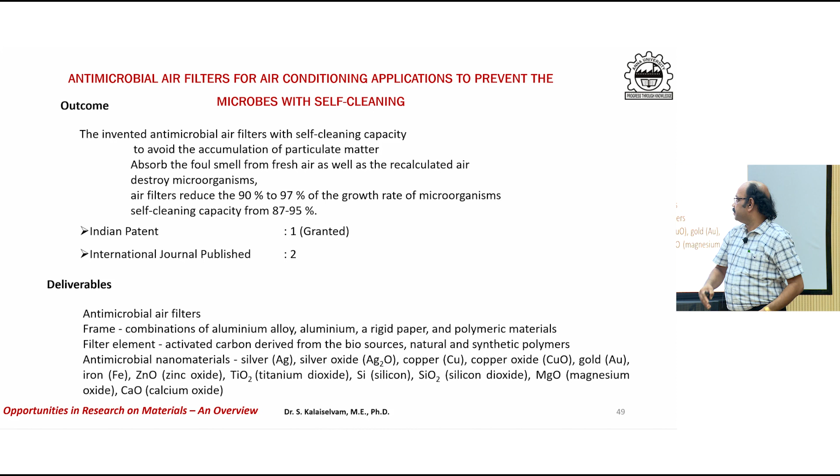So this particular filter will reduce the growth of the microbes. It will kill the microbes, and this filter has a self-cleaning capacity, right? The dust will not accumulate; it will settle down. Using this, we have one granted patent, and we also published 2 international papers on this work.

These are all the filters. For the frame material we use aluminum alloy, aluminum and polymer materials, and the filter element is made with activated carbon from biosources. We also use natural and synthetic polymers. As antimicrobial materials, we use silver, silver oxide, copper oxide, gold nanomaterials, iron, zinc oxide, TiO2, Si, SiO2, magnesium and calcium oxide. These are the various combinations of material we use for making the filters.

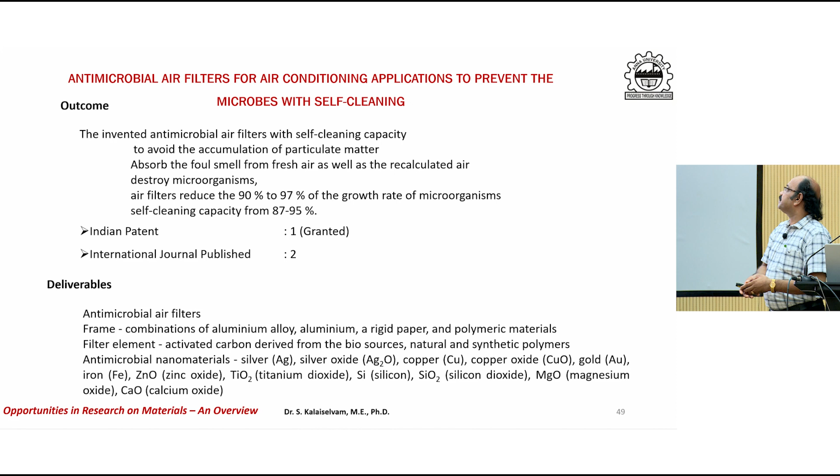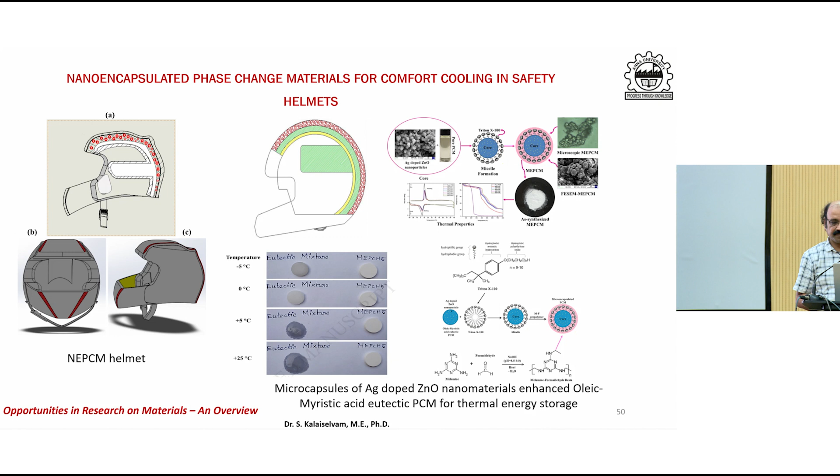Normally in adverse climates we have to keep the body warm, right? For that, this material can be used. But when it becomes cool, it has to be recharged. For recharging, we introduced electrical power connections. It can be attached to a battery and it will be re-energized. Okay?

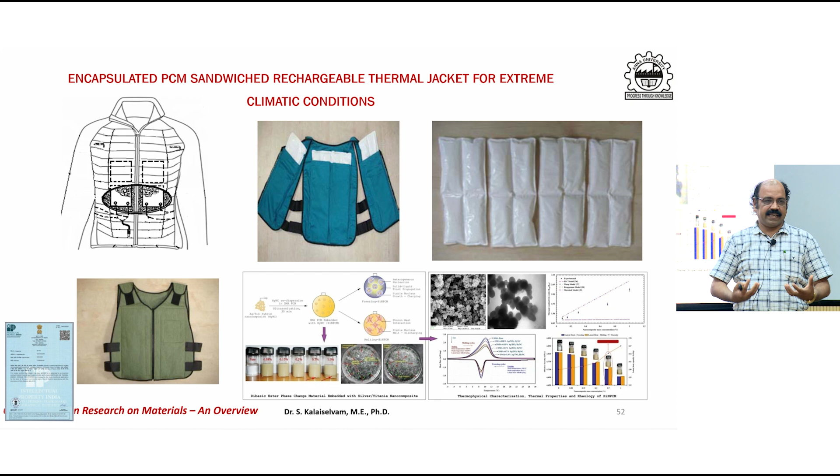Okay. So here again, so far our group has published more than 100 research articles. If you look at that, we don't do any wonders, right? We just replaced it with a material, the same material. If you go deep into the material synthesis or material production, it's the same procedure, only slight modifications, right? If you work on the mechanical background with air conditioning or refrigeration units, you don't find this type of wide usage, okay? And again, if you go with a conventional way of doing research, you have to know how your research can be converted into application perspectives, right?

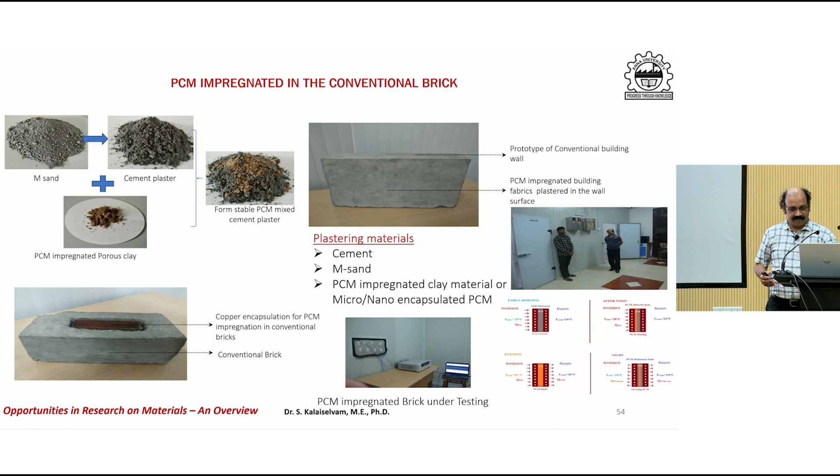And again, in case of research, right, you must be well organized. If you look at that, there are two types of people, right? So normally, mostly, we will be like this. Whenever there is a problem, I used to say to my research scholars, whenever you have a problem, you must be happy, right? Whenever there's a problem, there's an opportunity to find a solution. If there is no problem, obviously, you don't have a solution, right? Even in a mechanical engineering department, getting a single item is very tough. There are a lot of formalities, rules and regulations.

Okay, that made me work very extensively, right? So because of that, we have more papers. And so far, almost 3 crores worth of projects we completed. So we must be more organized. And this is the last slide. Normally, this is really required for a researcher.

So you have to set a goal, right? So how does it have to be? For fixing a goal, it must be a very specific goal. You must be very specific, and it's a measurable one, right? If you say that maybe next day I want to land on the moon, that is not possible. What is possible, that has to be fixed. For a researcher, that is very, very important. So it must be very specific, or otherwise it may be very tough, or whatever we discussed in the previous slide may not be important.